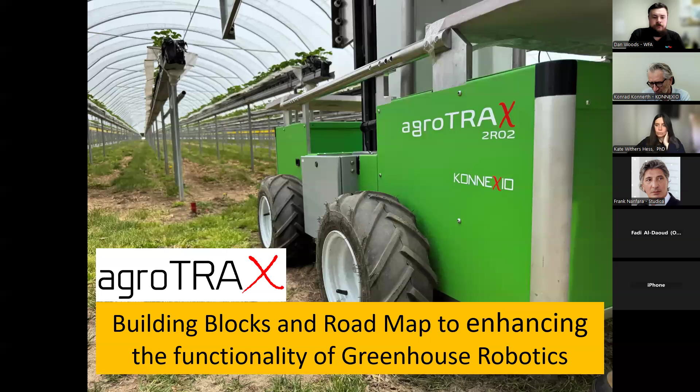So we've been, maybe first I'm going to start off. I'll get my controls here. Maybe I'll just introduce ourselves a little bit, who we are as a company. I'll take about 5 minutes to show you in general what we do, what we've done, before we get more into the ag side of the business. I think it helps bring everything together.

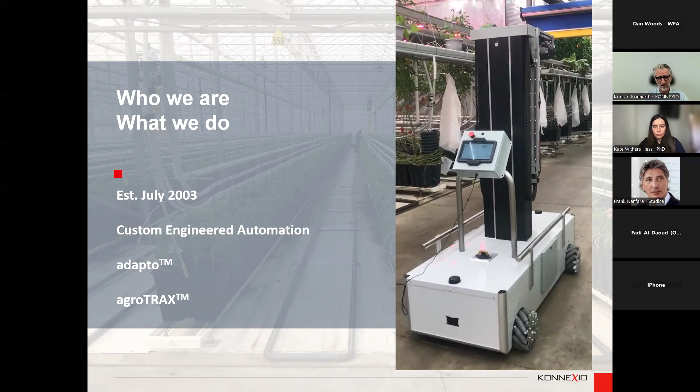We were established as a company in 2003. We incorporated then, and our main focus has been, and still is to some extent, custom engineered automation systems. So we build based on customer specifications, building machinery for them, a lot in the manufacturing industry. Then I'll talk a little bit more about the Adapto, which is our industrial side, and the agroTRAX, which is the robotics, the agricultural robotics side of it.

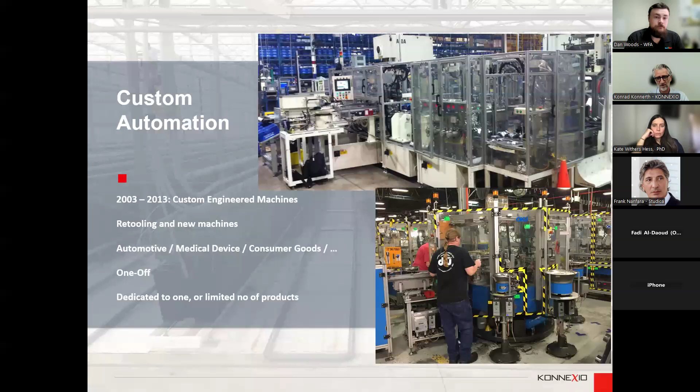So custom automation is really very much, as the word says, custom built. You're basically taking a contract from a customer to design and manufacture a piece of machinery. It's pretty much one-off, there's not much repetition other than the experience you have from past projects. But quite often these also involve retooling projects from existing machines that are already out there.

And we did that for about a good 10 years. Now the goal always had been, when I started Konnexio, the dream was always to have some kind of a more standardized piece of equipment. I saw some real difficulties in machine building - it's very much up and down, sometimes you don't really know from project to project how successful it's going to be. So we had this vision of developing a pre-engineered machine.

Finally, after 10 years of being in business, we decided, okay, we have to get moving on this. It still took us about another 5 years to develop that concept, that base machine system. In 2018, we first shipped our first machine from that functionality, which we called Adapto. Really what it is, is a pre-engineered solution.

So what you have is pretty much 80% of this machine already in place. It's engineered, very often we have it pre-built, and we're just using it to tool up for the actual applications our customer wants us to do. They're very modular in itself.

And when I'm saying modular, they don't just physically look modular - each one of these cells, as you see in the top right-hand side, this machine is about 10 cells, but literally all of these cells are actually their own machines, individual machines. That makes it truly modular. So if something changes, we can pop a cell out, we can add cells to it.

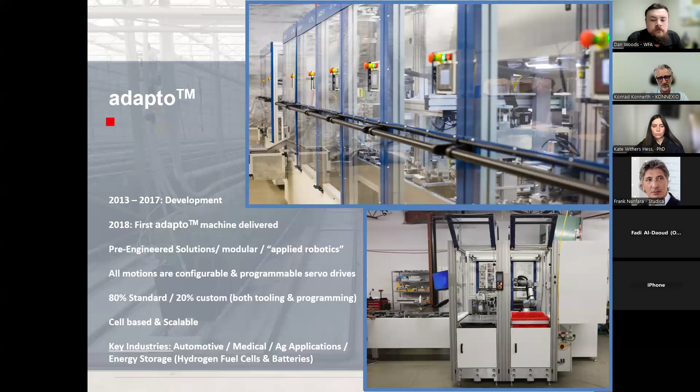We've actually done some ag applications as well, and I will show you some of those. A lot of it nowadays is also in energy storage, like hydrogen fuel cells, and we're trying to get more into the battery side as well.

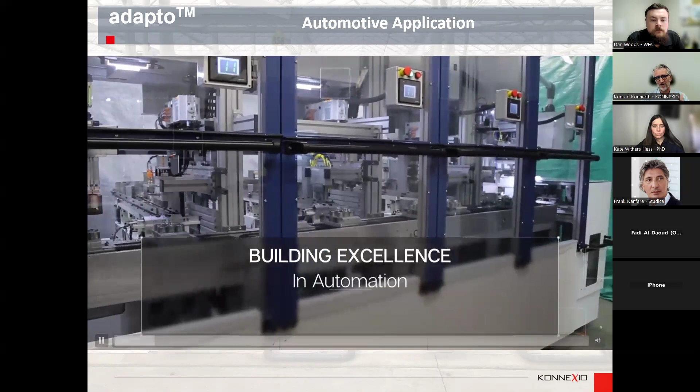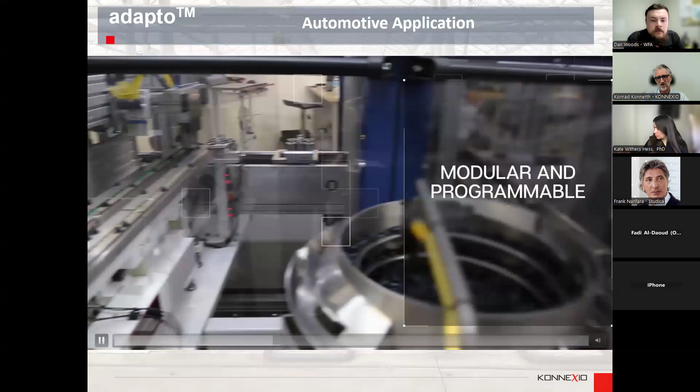Very quickly, this is like a typical machine, how it would look when it's functioning. Again, very mechanical, very much out there. But all these motions we're driving are servo-driven robotic motions, not pneumatic, so they're very much controlled motions. Typically we achieve up to about a 2-second cycle time with this kind of machinery, so it can be very fast but also slower depending on the application. The processes sometimes may take longer, but the machine itself is capable of about a 2-second cycle time.

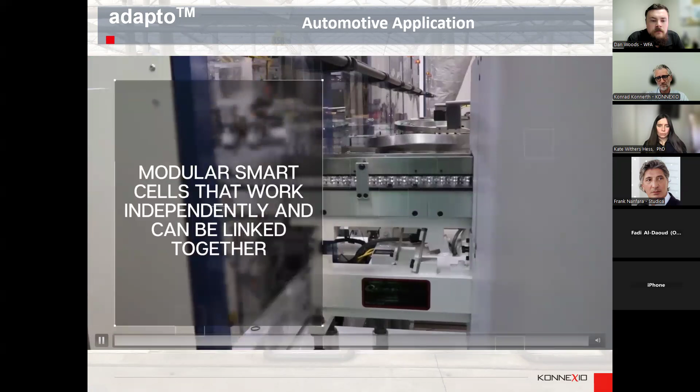And then we actually did a soil dispensing machine, which is a bit more ag related, on the same base system. Here we did some volume metering, so we dispensed soil and made sure it was the right volume, actually by weight.

This machine could handle various sizes of volumes that we had to deal with, and it also had various crucibles and trays to handle. We actually used the existing wood pallets that the soil samples came in, so we didn't ask the customer to replace all those. This was also programmable depending on which volumes they need to scoop - you can program that on the machine and tell it what you want to do.

In its full capacity, the machine is capable of doing up to 24,000 dispensings per shift per day, across each of the multiple cells we have in there.

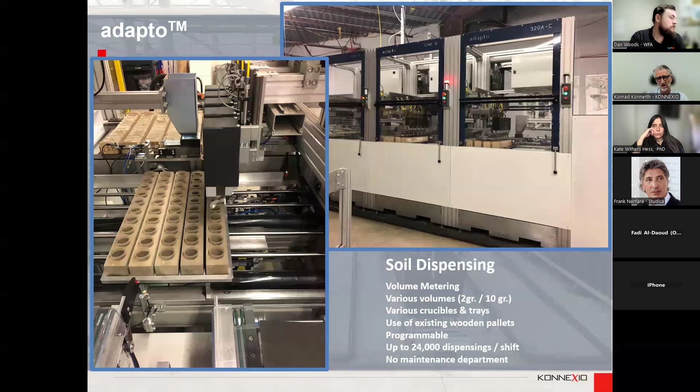The big kicker, which most of our automotive customers are always amazed by, is that this customer actually has no maintenance department. Very often in most of our current or industrial applications, customers have maintenance departments used to keeping the machines up and running. But because of the pre-built scenario - the way our machines work, having been pre-built and tested - there's very little maintenance required.

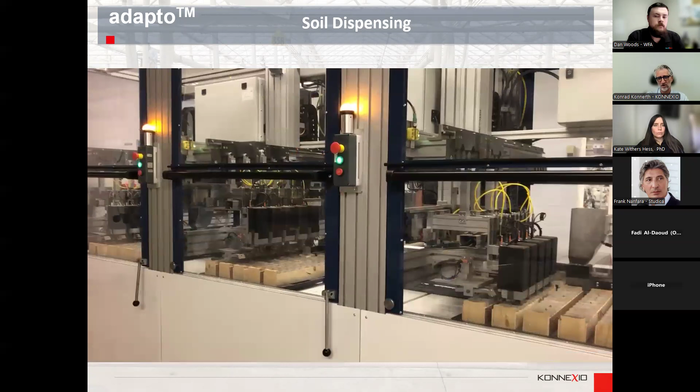So a machine like this functions something like that. Again, the tooling here - the actual soil scooping - is completely custom to this application. But the motion and handling of the machine, the way it's set up and functioning, is actually standard. It's a little bit like when you buy an industrial robot - you know the functioning of the machine, what it can do, the payload, the reach, the speed, and the programming involved.

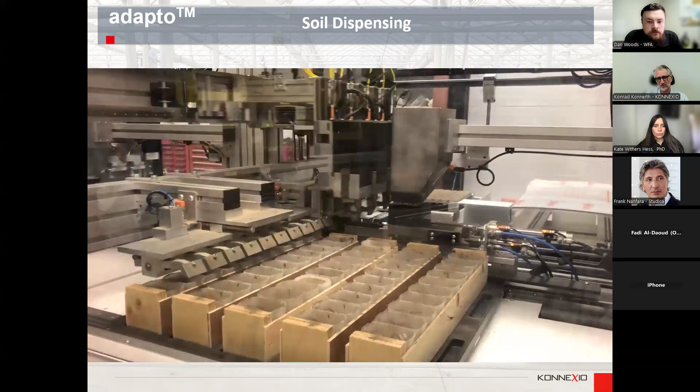That applies very much to our machines too - the machine has that capability. What you need to put on is basically the tooling, what you want the machine to do. Very similar to a robot - when you buy one, you still have to tool it up and tell it what to do.

So that's a little bit on the ag side, on the base machine systems that we're building industrially. But now let's get more into the agroTRAX, into the robotic side of it.

We got Greg from A&L - he has a little bit of a challenge for us. At one time we chatted about it, and he said he has a lot of drones going over fields inspecting stresses in the fields and so on. But he said he cannot get into the greenhouses because you cannot use drones in greenhouses. So he asked me, can you build a system that can get a vision camera on top of high wire pepper plants? How would we do that basically, how would we get up there? The pepper plants in a greenhouse grow up to 15 feet high, plus you need a little bit above that. So how would we get a camera up there and then go down the whole rows to inspect, using that for scouting. That was the initial challenge, and we worked on this - let's get a little more into the details of how we normally develop these systems.

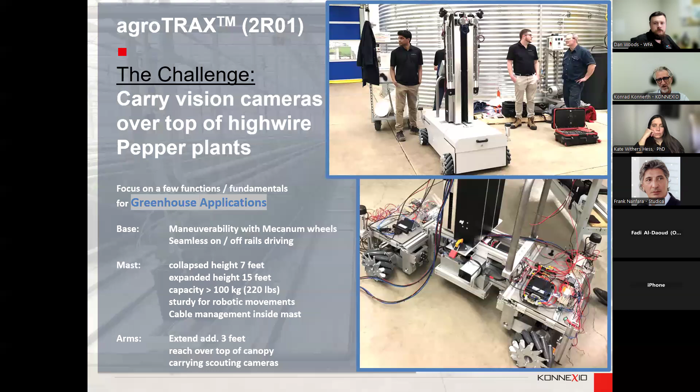On this specific version, we added some arms that extend over and above, kind of flip out over top the canopy, an additional 3 feet, because the mast could only reach 15 feet in this case. So that was our initial kind of system that we built.

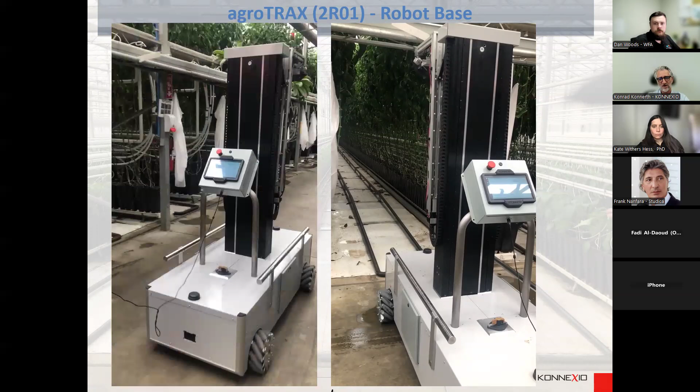I'm showing here a little bit how nicely those Mecanum wheels are really good for maneuvering. So when you turn them, they can really swivel quite nicely on the spot and quite easily. Yeah, so they're quite nice from that point of view.

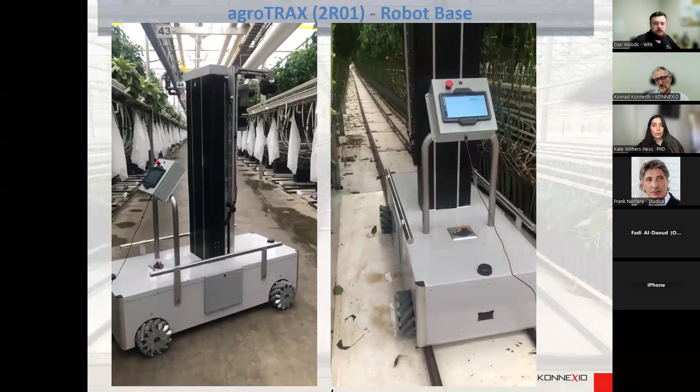And here just to show you that you can drive on and off the rail - I guess we weren't fully aligned there, but it still finds its way onto the rail quite easily. There's really a seamless driving on and off, no hesitation there or issue there. And it did, of course, do this autonomously as well.

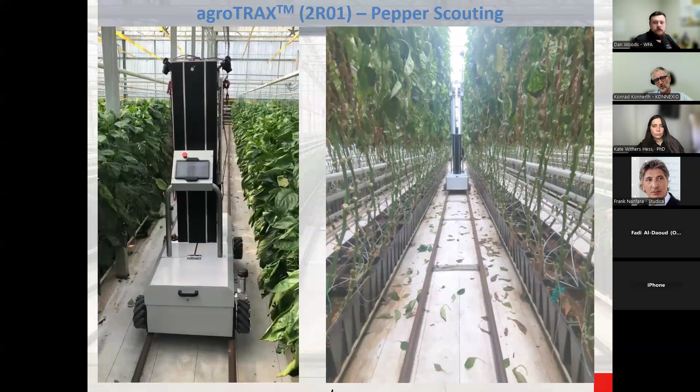Here it shows a little bit how it drives along on a rail, for example. It can go pretty fast, and of course when you go forward here in the scouting area, you would go fairly slow. We're showing this in the second picture on the right side, the second video.

It's a little bit hard to see, but the robot actually comes towards you, and at the very, very top there are 2 cameras mounted on there. It's maybe a little hard to see because of the light against the sun, sometimes hard to identify. So we would be moving always a few feet forward, like 2 feet or so, and then take another set of images, then go another 2 feet, take another set of images. That was kind of the idea for scouting for stresses in the greenhouse.

And just to be clear, we actually did not do the camera side of it. We were responsible for the robotic side, but we did not do the scouting aspect, because we're robotics engineers - we don't claim to know anything about the vision camera side of it, and especially the scouting ideas.

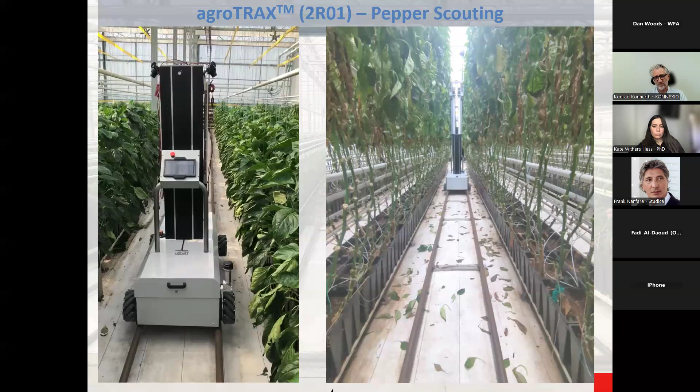And that was kind of the first project. It worked okay. The customer actually did say that our robot was working really great. I mean, it did what it was supposed to be doing. The functionality of the scouting still took a little bit longer, and I think it's still ongoing right now. It's a little bit more complex, obviously, than that.

But like I said, the customer gave us really good feedback on the robot and the way it worked and behaved. A few years later, we then started to talk about another application for UVC strawberries. And actually, that is a project right now we're just implementing at the moment. So we started about a year ago on this project.

And so here, it was a little bit different, even though I said we want to focus on greenhouse. Actually, this is an outdoor application. But as much as it's outdoor, it still fits very well with what we're trying to accomplish and where we want to go. But of course, the outdoor makes it a little bit harder sometimes in some aspects, and we had to learn the hard way, unfortunately.

So here the base system had to be maneuvering on the field conditions, and I will show a few samples of what that means. I guess you all know, but it can be sometimes challenging for a robot. And it had to fit between those tabletop posts.

As you can see, there's not that much space. It looks decent for a human, but for a robot to make sure it can steer along those things, it's not always that simple. So basically, on each side of the post, we have only about 4 inches of space left that we can move along.

And so the navigation was a little bit of a challenge, or is still a little bit of a challenge. We're just finalizing that right now, following along the aisles. They're about 300 feet long or so. And of course, recognizing the end of the aisle and then returning back home again.

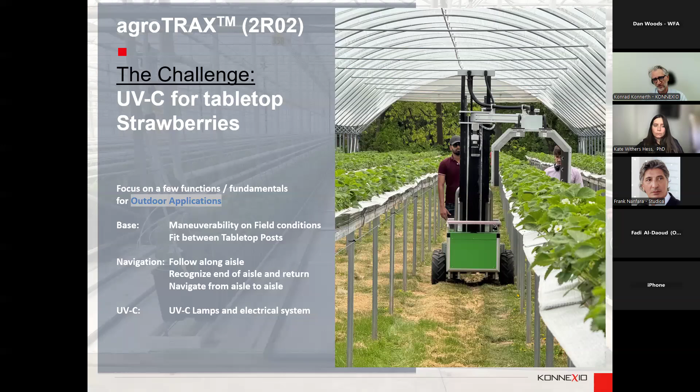We did, however, as I indicated, have a few challenges that we were kind of underestimating. And that was really the conversion from the Mecanum wheels to the skid steering. We just thought we'd put other wheels on there and reprogram the steering, tweak it and work on it, and far from it. It was way more complicated. What we found was there were actually some major issues that we had overlooked and underestimated.

One was the torque on the motors was really far from being sufficient. The wheelbase geometry actually contributed to the issue. And the tires, of course, from a traction point of view, had to be beefed up as well. We knew that, obviously. So at the end of the day, it took us a good few tests and a good few different iterations to get to that stage where we finally got this rover actually moving quite nicely.

It has now, of course, a wider ATV style tires. We had to do a new motor gearbox and programming for this, a completely new system in there. We had to modify the wheelbase geometry, actually bring the two wheels closer together because we had them too far apart and they would fight each other. We could not get them to work that way.

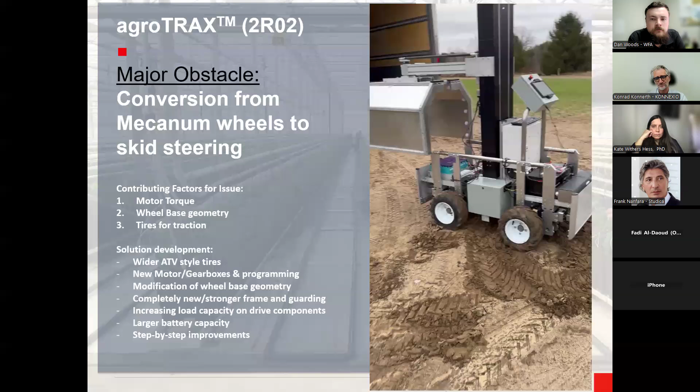And of course, like I said, we were kind of going step by step on this. But the result was still good, and this was actually an image taken last fall, because we wanted to make sure we're on the right track before we're going to do all the rest of the work. So as you can tell, now this thing actually moves and it can rotate and has enough torque and enough functionality to do what it's supposed to be doing.

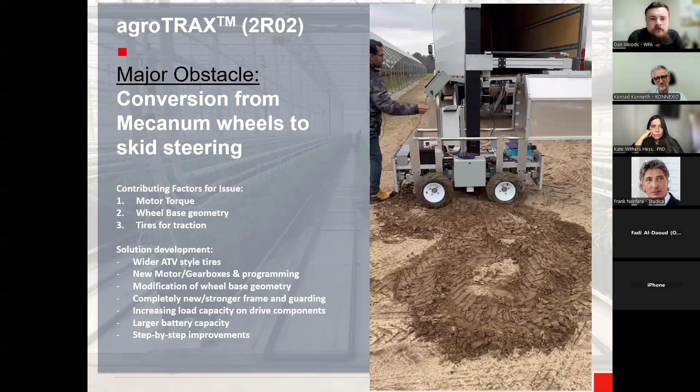So this is kind of where we are right now at the moment. This is actually running autonomously, although our guys are following it just to make sure it is safe. We're still in the testing phase and the implementation phase right now.

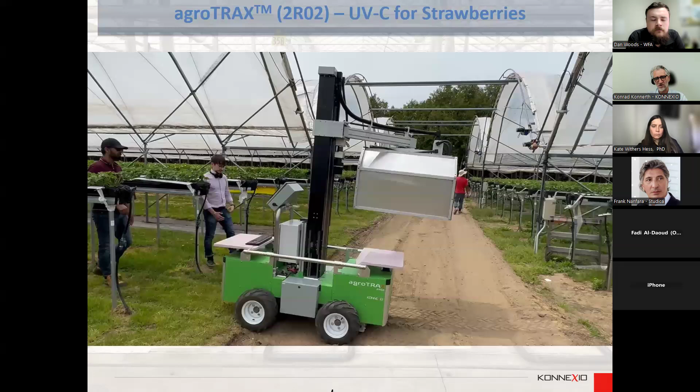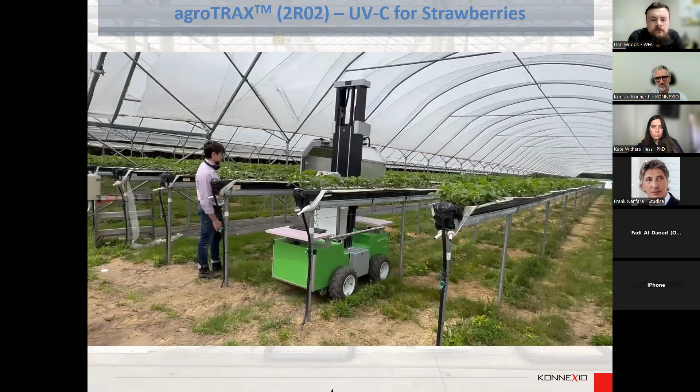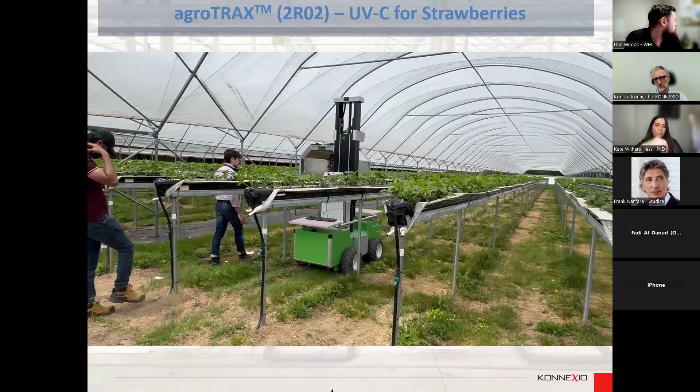There's always little things that you need to tweak and adjust. You see all the unevenness, and with the mast holding all the UVC hood, it has to be sturdy enough to handle all these things. Same thing when it goes into the greenhouse. If you work on 15 feet high high-wire applications, the system has to be sturdy to handle all these applications, especially if we get into some kind of robotic harvesting or robotic motions.

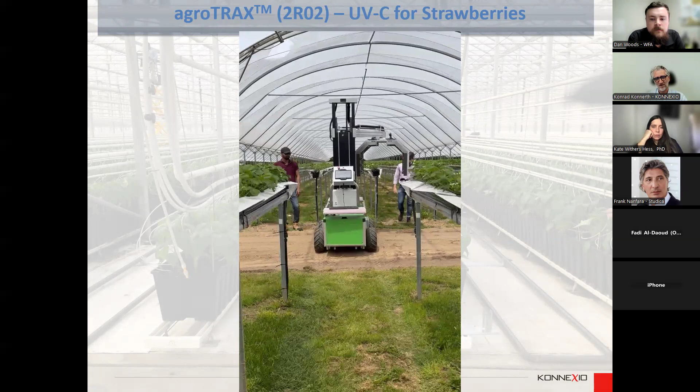There's another example, and this is actually not bad. I assume this is probably as good as it gets for a farm, from a soil preparation point of view. So we had to test it and make sure it's all safe and it doesn't fall over or anything like that. But it is sometimes challenging for us, and we need to verify all these things.

So where we are right now with this project is it is actually now functioning. We're just finalizing the navigation part of it, testing it all out and following it.

What's going to be happening next is next week we're going to have OMAFA work with us to set the right UVC dosage, and then we're going to start measuring that. They will also develop a plan on the strawberries to verify. So we're going to do a controlled environment where certain areas get no UVC and just chemicals, some areas UVC and chemicals, and some areas just UVC, verifying what the different impacts are on the strawberry plants. OMAFA will then measure the efficacy of the UVC and help us set the dosage.

We do have a few more things we'd like to implement at some point, which we haven't had time to do so far, which is integrating active suspension into the system. We've actually planned for it, and it's all installed and wired, but it's not programmed yet. What it would do is measure the condition of the rover and readjust each of the four wheels individually to always keep the rover balanced. It was just a timing issue that we haven't been able to get to that.

But as the rover keeps going, because obviously this application will be at nighttime, once it starts going into operation we'll have the daytime still to do other things, to work on improvements and integrate other systems.

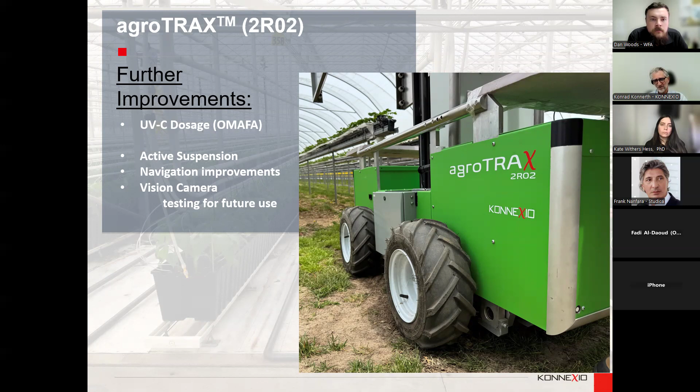We do want to integrate some vision cameras as well. At this stage, there's no mandatory requirement for that, but we'd like to have a look at the plants and plan for future applications to see what we can actually see. Is there something we can track from there, any data we can get from there? I'm a firm believer of let's just start easy without having a full commitment to something, but let's just get an understanding of what we can actually identify and what's actually out there.

So all of this made me think a little bit. It's been probably about 2 years now in the thinking for myself, where I reflect a bit on the developments between industrial automation and robotics. I pretty much feel like there's somewhat of a difference, although they sound very similar. For me, I find that one side is a little bit more engineering, and the other side is literally more invention than engineering.

On the industrial side, you start with a very clear specification. The customer tells you exactly what he wants, and there's parameters. It's all pretty much identified up front. While in robotics, I find people more often provide you with a problem or an opportunity, basically, and you're trying to work around that. Very often, it's more an ingenious solution.

And what I've found is I'm always fascinated when I talk to growers or farmers because they actually have very simple or very good ideas for problems, while engineers sometimes think way too complex, way too difficult around things. So I find it's not always helpful to have people from industrial automation work on those things. You need to see what's out there, what actually works. It can be much simpler sometimes.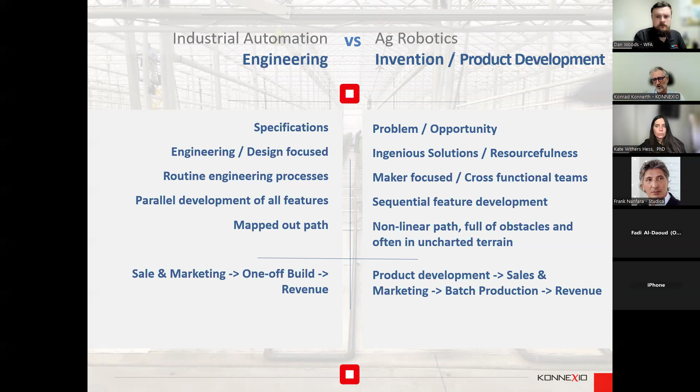While in this side of it, I'm still struggling with that, because farmers are not really interested in developing stuff. They're really more interested in getting a product that's finished. So we need to think about what actually makes sense - how do we develop, what do we want to develop, what is actually valuable to farmers? And then try to sell it and produce it, hopefully in batches, because producing it one-off is very expensive and probably not worthwhile. So it's more like a batch or volume production, and then get to revenue. So all these things are a little bit different.

So our approach, for both adapto and agroTRAX, has been to standardize and then to adapt. We don't like to go out - and so far these have mostly just been R&D projects, not actually committing to customers a full deliverable product yet on the ag side - but we like to know what we're going to be promising, and figure out how we deliver on that. We always like to try with a pre-engineered and tested system that we know how it's going to perform, at least to 80%. There's always some stuff that needs to be adapted, but at least we don't want to start with a blank sheet.

And then we want to continue to improve those features on the system over time, because we want to make it better and better and get more features into it. And of course we're also trying to improve the cost and bring more value to the systems we're sending to our customers. The adapting side is customizing it to specific applications. For example, we're hoping the rover base, the mast, and the whole system - the way you're driving it - is all standard for us, and then putting different applications onto this, like UVC, scouting, hopefully robotic harvesting, and other things at some point in time. So it becomes really more 80% finished and 20% unknown that you're putting in there.

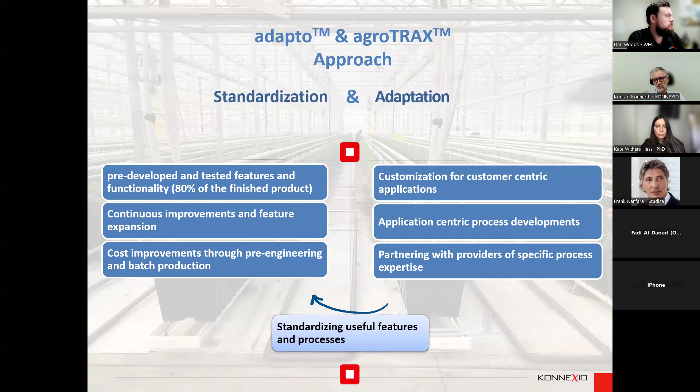And we would also like to partner with companies that have specific expertise in certain processes they can do. We're not interested in doing it all ourselves - I don't think we can. We'd much rather partner with somebody, saying: you develop the process, and we develop the base machine and help you get it out there. And then, of course, anytime we have a useful feature developed for a customer application, we'd like to standardize it, finesse it, make it better for future use, and propose it.

Over the years, my mantra always has been a robot should adapt to an environment and not the other way around. And same goes with robotics and humans should work in unison and not be in each other's way. What I mean is, as much as we can, we're trying to live with or work around current conditions and not try to adjust the conditions too much.

For example, in the soil scooping system, we really worked with the customer to use their current containments of the soil and not ask them to modify them. Yes, they were not perfect, yes, they were not ideal, but the cost and complexity of changing thousands and thousands of containments that they already have in place would probably not be valuable.

Same thing, let's say, on the strawberry farm. If you put too many conditions in place, requiring certain guardrails or markers onto the system for navigation, it becomes very difficult for them to implement and becomes very costly. So we're trying to see the current condition the way it is and do our best to work around that, basically.

We do also believe that nobody can do it alone. So we like to collaborate and use the expertise of others. It's very important to us whenever we can, we'd rather not do it ourselves. We also always go under the presumption that we know robotics, but we do not know plants and crops. So we're looking for feedback from growers and others with experience to help us understand that. We're not claiming we know exactly what they need and what is actually required.

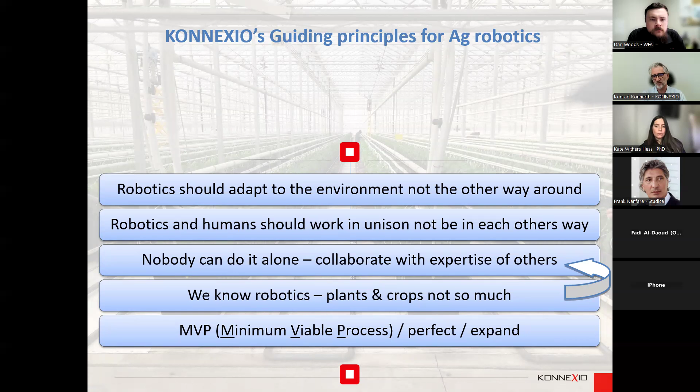Our motto has always been to work on MVP - in this case, it stands for minimum viable process. You develop something that gives some value to the growers, and then you keep perfecting it and expanding it after that. But you don't try to overpromise and over-extend yourself so that you never get to an actual delivery side of it.

So we are still looking for partners for different aspects that we are not really the greatest at. Data, for example, is not something we have been tackling yet on a great side of it, and I know there's some people in this group here that could definitely help.

Navigation is an aspect that we'll keep trying to get better at. We have some rudimentary navigation built in that works for current conditions, but I think we have to do a much better job. Vision is still a big aspect of it - scouting, crop identification, yielding, these are things we would still like to do.

And then we would like to know, of course, from growers here in this group, what are specific process applications that you see as valuable? What is it that would make sense to you, that would make sense to develop and go into, that can be adapted towards?

How are we doing with time? Are we good for 5 more minutes, 2 more minutes? Sorry, I was muted. Right. Yeah, you're good for a couple more minutes.

Okay, perfect. So calibration, I kind of mentioned this a few times, but I think I really would like to stress that it's actually the most important part, especially in this industry, I find.

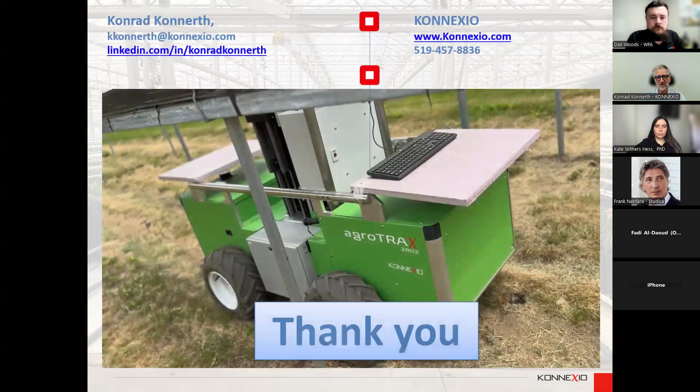So with that, I'd like to thank everybody for joining here, and I'm looking forward to having a good discussion about these things.

So we did have one question for you in the chat that came through. Someone was just wondering, when you mention UVC dosage, what exactly do you mean by that?

Yeah, so we're trying to verify how strong the UVC is at a certain distance. The dosage means you have a certain strength of the UVC lights — the further away you go, the less it is. What we're trying to establish is how fast we're going to be driving past, and how much radiation is going to be applied to the strawberry plants. If you stay too long, the dosage could be too high, and you could have adverse reactions to what you actually want to achieve.

So we need to apply a certain amount of UVC, and we do that basically by controlling our speed — we have a controlled method for how fast or slow we drive. The grower can set that, but we also need to measure the strength of the UVC lamps first before we know that, and there's a calculation factor for it. Don't ask me, I'm not a scientist, but a factor can be set up, and then we know exactly what the dosage would be, and we can vary from there. We're setting that and trying different parameters — a little faster, a little slower — to verify, at that dosage, what was the feedback, what was the reaction, and if you go faster or slower, what happens then.

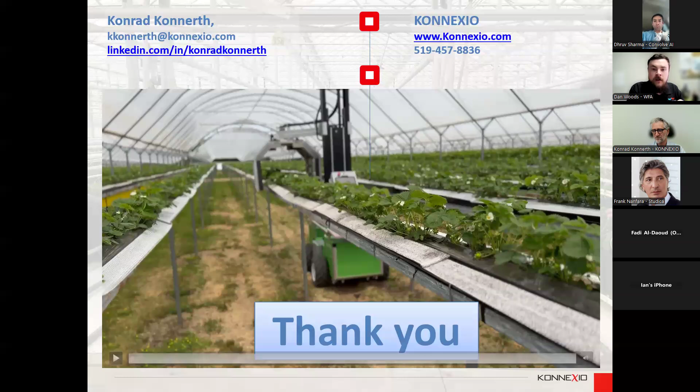Thank you, great presentation Konrad. I just wanted to ask at a higher level, what are the most common vision-related problems, or what kind of applications do you need help with? I come from a vision background, so was just curious to understand.

Well, I think the biggest thing is crop identification, yielding for example. I've seen a lot of interest in that. And then of course the other thing is scouting, but when it comes to scouting, the question is to what level. It's more about finding certain diseases on a plant, which can be difficult sometimes, down to very minute insects or diseases and identifying what they are. That's usually been a big issue as well, but again it comes down to the growers and what they're trying to identify.

I'll reach out and we should talk more. Perfect, thanks. Excellent, thank you. Konrad, thank you very much for your presentation and your time this morning. We really appreciate you. Thanks.